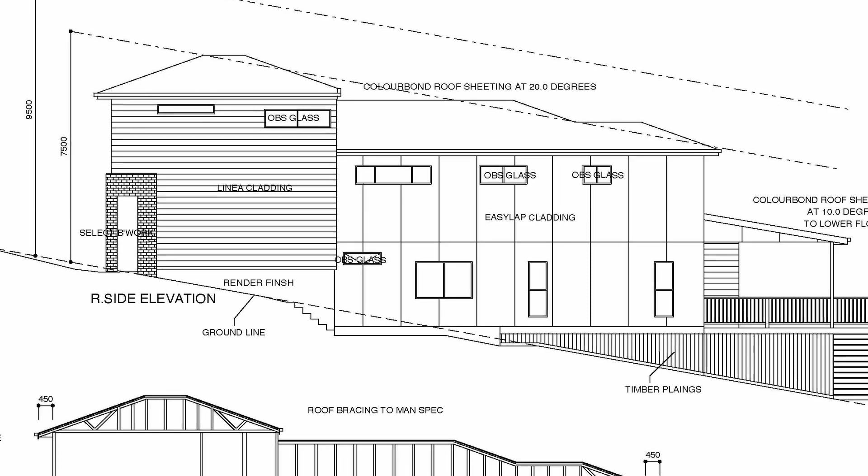For this particular job, we had an interesting sloping site with a significant height difference of 8 meters between the highest point to the lowest point. The site sloped away from the road, which presented its own challenges.

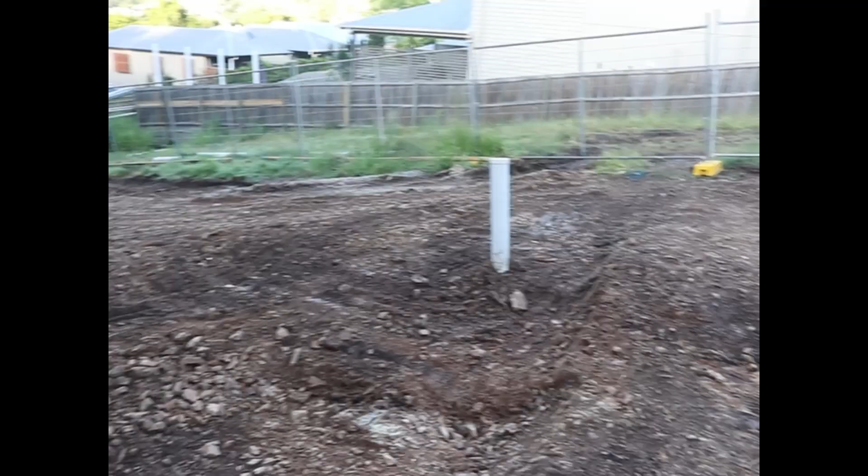When designing a building on a sloping site, the considerations can be quite different depending on the direction and magnitude of the slope and the budget of the homeowner or developer. For this particular site, we had a number of design considerations which we used to deal with the 8-meter slope.

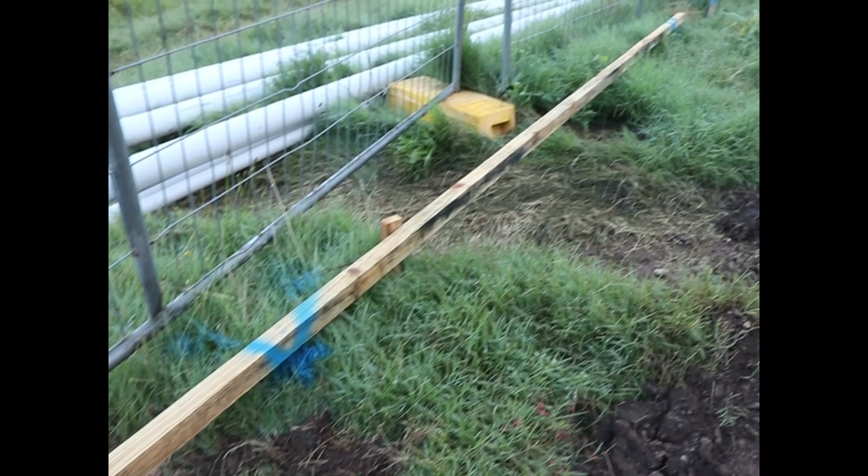After the lower retaining walls are built, we commence with cutting and leveling the lower slab area. The critical points of the building are marked by our surveyors, and we also pin the profiles, which are placed away from the building on the side boundaries of the site. This way, when we eventually lose the main surveyor's pins, we can retrieve those pins using the offset pins which we have on the profiles.

As the concrete slab is split between the lower and upper slabs, we require a retaining wall between the two concrete slabs. We commence the retaining wall construction by excavating the retaining wall footings. In this case, as the retaining wall was to be connected to the upper slab, the design required a 600mm deep by 400mm wide footing.

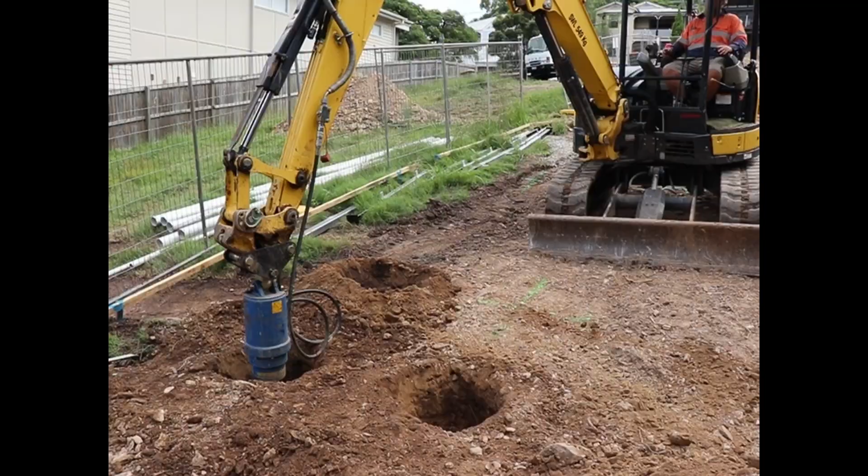While we have our machines on site, we proceed to excavate the rear pier footings. These footings will support the rear steel SHS posts, which will be set to height and will be the supporting structure for the suspended timber floor system.

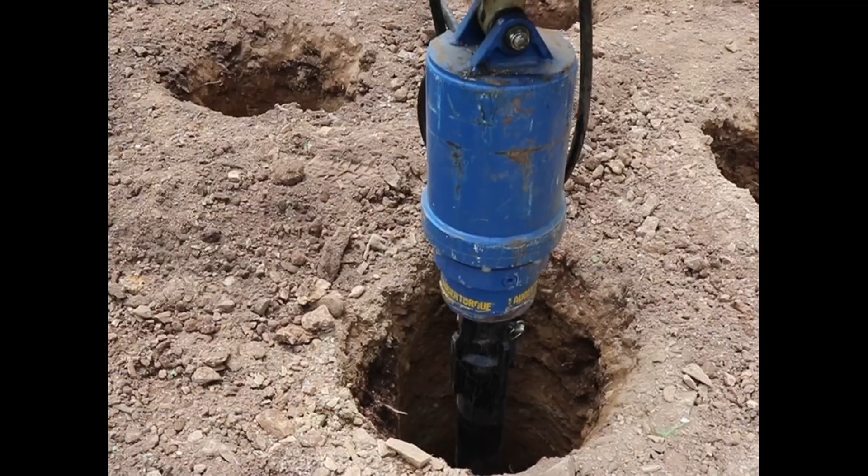When excavating pier footings, it is important to leave the pier holes as clean as possible and free from loose soil. It is critical that our concrete footing is placed onto a clean and solid foundation that will not settle and sink over time. To remove any remaining soil from the bottom of the pier holes, we use a special clean-out attachment at the bottom of our excavator's extended shaft.

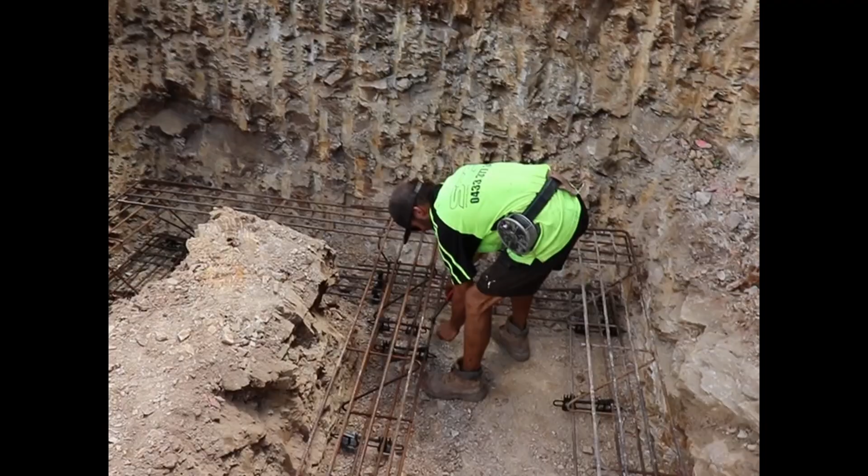Once the retaining wall footings are excavated and cleaned from loose soil, we proceed to place the reinforcing steel. The details of the steel cages, thicknesses of bars, ligatures, corner bars, concrete cover, concrete strength and other characteristics are provided by the project engineers in the structural engineering drawings.

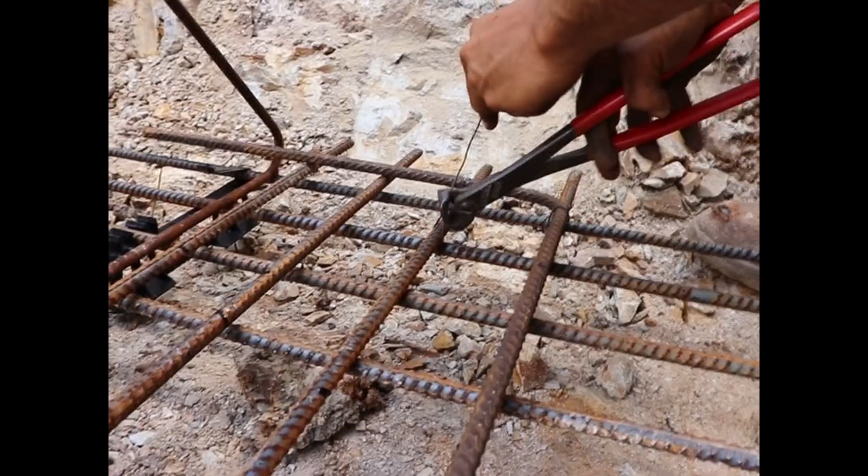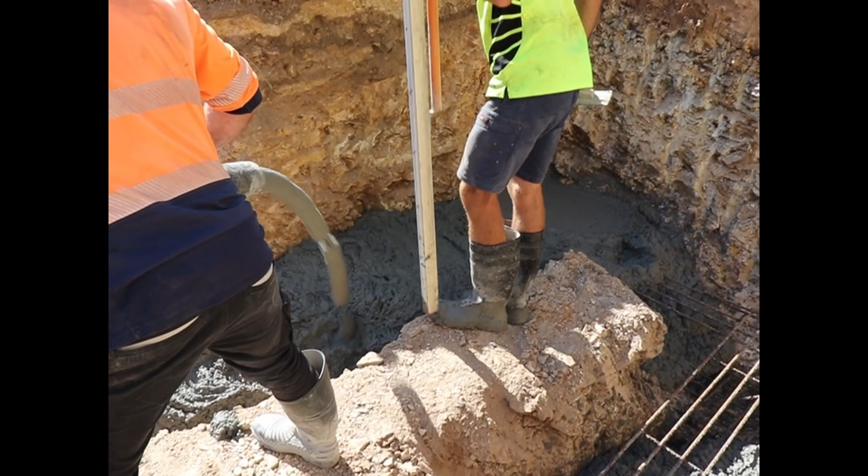If there is any confusion on site about any of the details or any unforeseen site conditions are encountered, which is not uncommon, it is important to raise these with the project engineers as soon as possible so that the details can be clarified or an alternative solution can be proposed. Once the reinforcing steel has been placed correctly and the footings have been inspected and approved by the project engineer, we can proceed to pour the concrete.

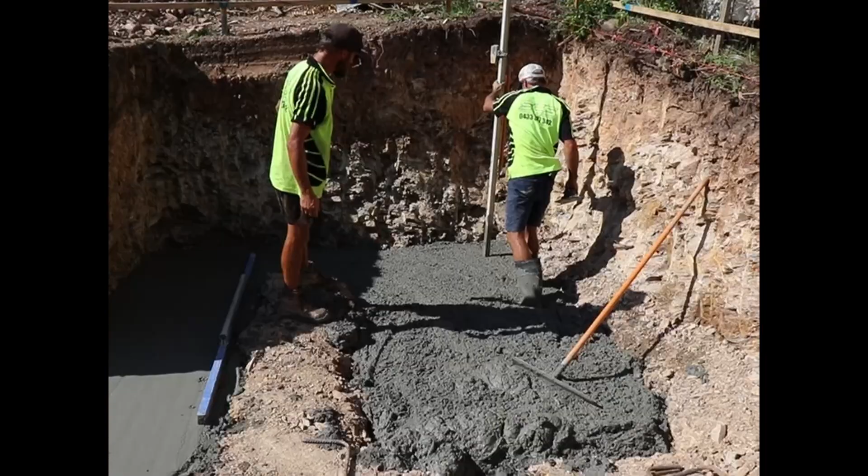In this case, we use a line pump to pump the concrete from the concrete trucks on the street to the retaining wall footings. Our concreters use a laser level to screed the concrete to ensure we are left with a smooth and level surface. We are now ready for the block layers to begin building the retaining wall.

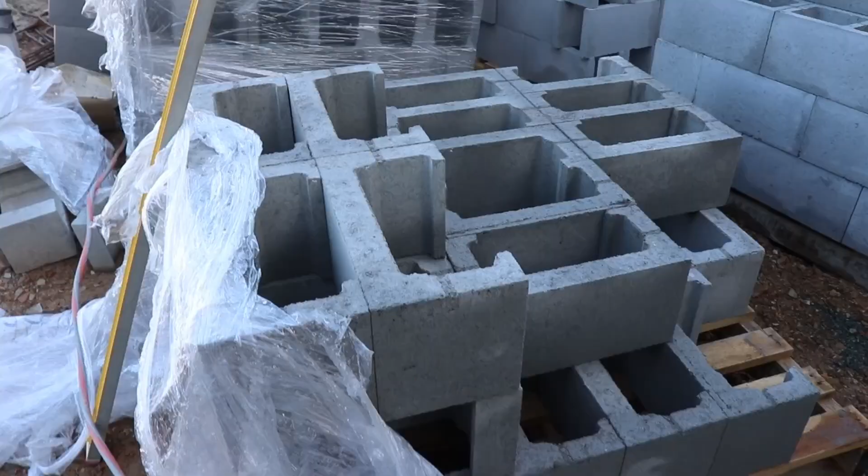The retaining wall footing is once again pinned by our surveyors, giving the block layers the precise location of the block wall. The first course or bottom course of blocks is a special clean-out block which has an open face. These are used to clean out any mortar which falls inside the wall during the construction process. Reinforcing steel is placed vertically and horizontally at regular centers inside the block wall. The details of the thickness and spacing of the reinforcing steel is again shown in the structural engineering design.

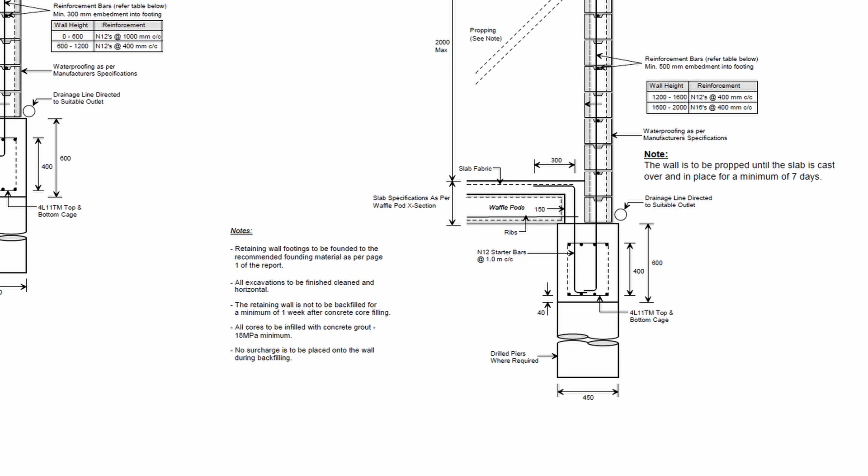Once the block wall is built, the structural engineer returns to site again to inspect the wall and the reinforcing steel. Once approved, the block layers can close off the bottom course of blocks and we can core fill the inside of the block wall with concrete.

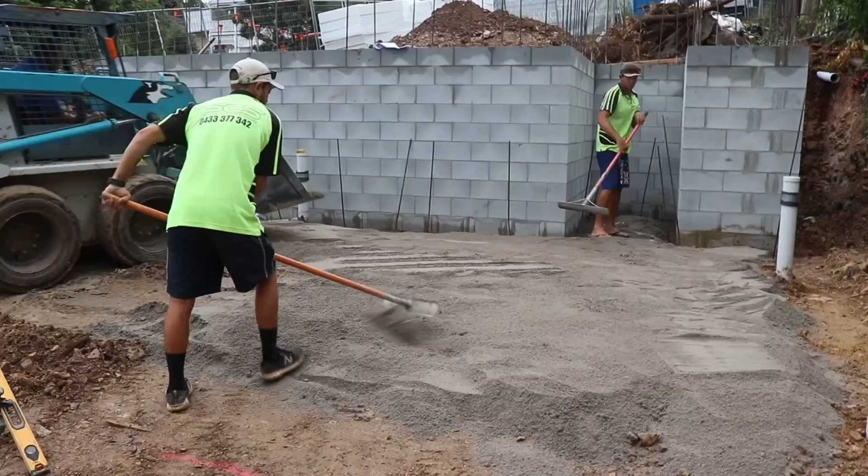Once the block wall is complete and the underslab plumbing has been installed and approved, we can move on to the lower slab. Compactable fill is delivered to site. Our concreters begin by spreading and shaping this fill to the correct heights. The perimeter of the slab is then boxed or formed up to the right height and at the precise location provided by our surveyors. For this particular slab, we used a waffle pod design.

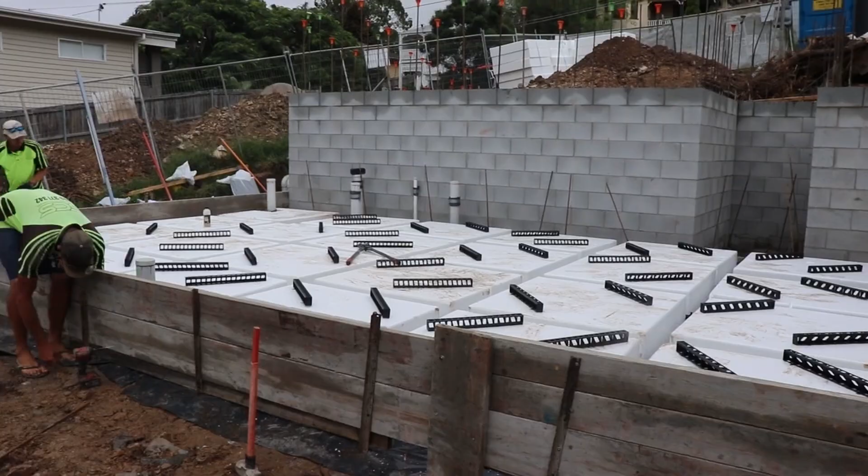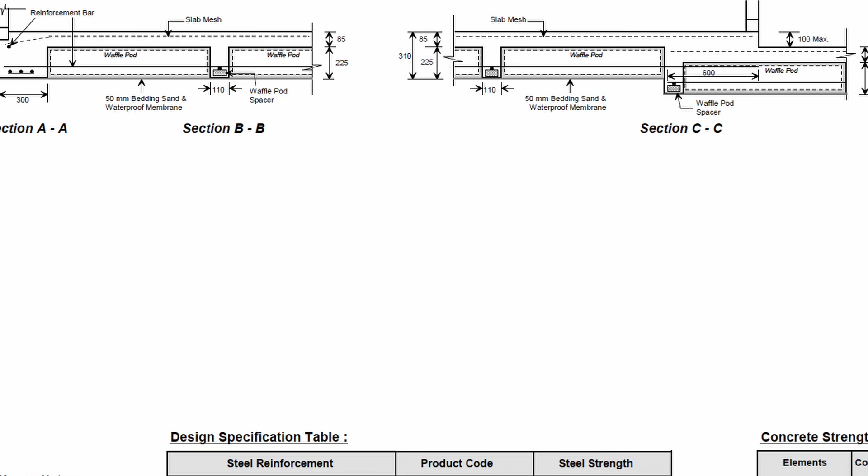Polystyrene pods are used at regular spacing to create a void inside the concrete slab. We leave spaces between each pod which creates an array of thickening beams throughout the slab. This, along with many other details, are provided by the project structural engineers and can be found in the structural engineering plans. Once again, we use a concrete pump to pump the concrete from the street to the slab area.

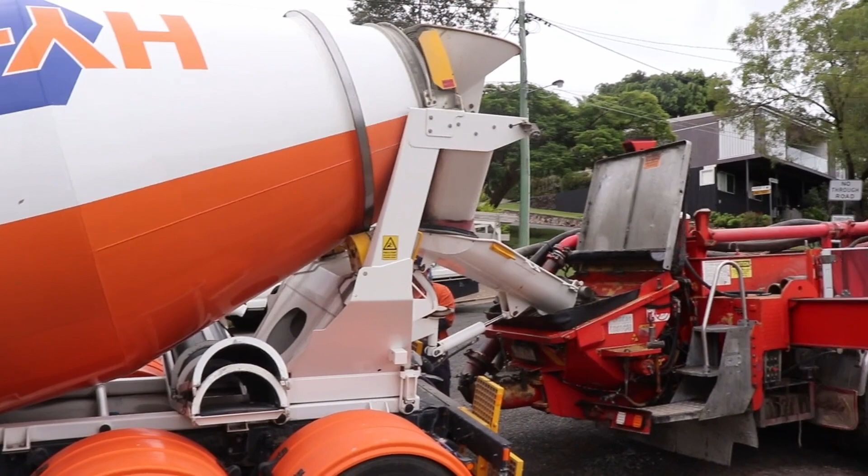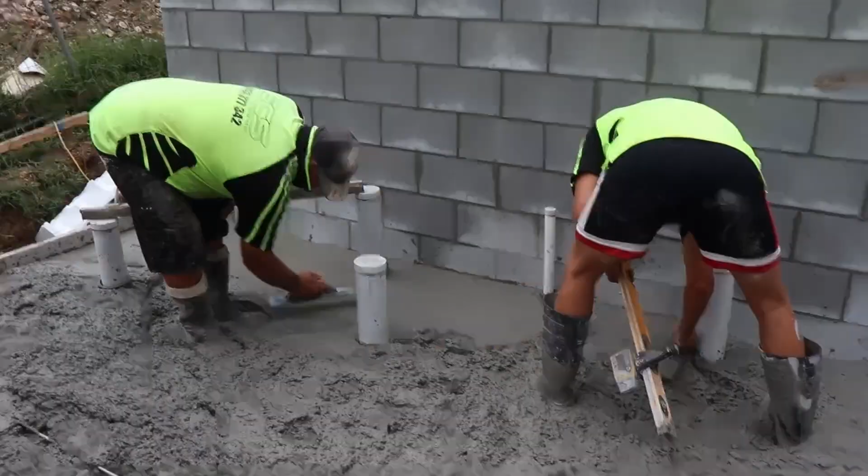In this case, we use a boom pump, which was preferable as the pump hoses are elevated overhead and do not obstruct the work area. Once again, we use a laser level to achieve the correct heights. Our concreters screed the concrete for a smooth finish.

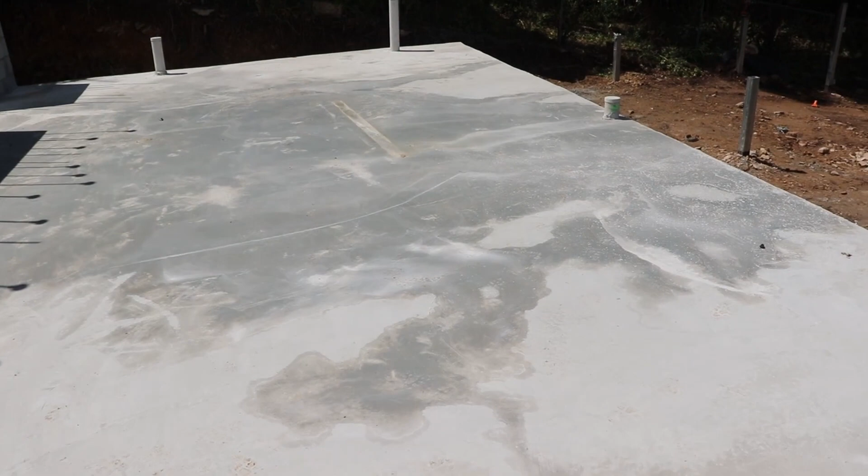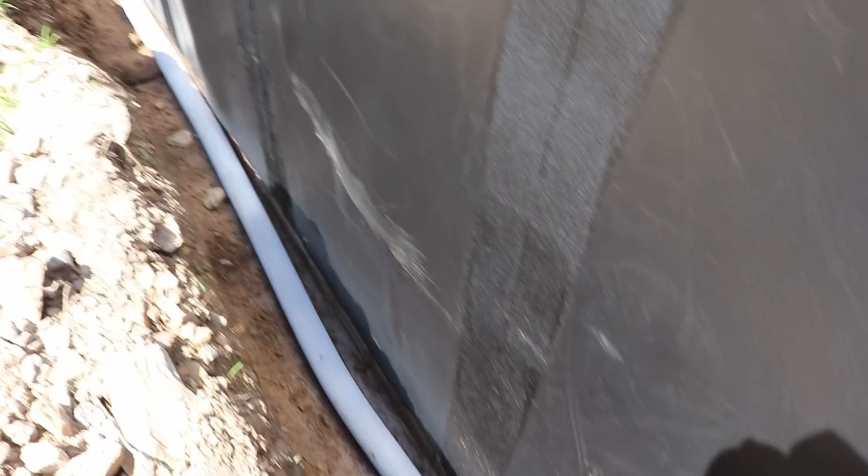The concrete block wall has now cured and we are ready to backfill. The back of the wall is waterproofed to protect the inside of the building from intrusion of moisture. We protect the waterproofing membrane with a layer of corrugated plastic. At the bottom of the block wall, we use a slotted ag pipe which is connected to the stormwater system. We then backfill the retaining wall with drainage gravel.

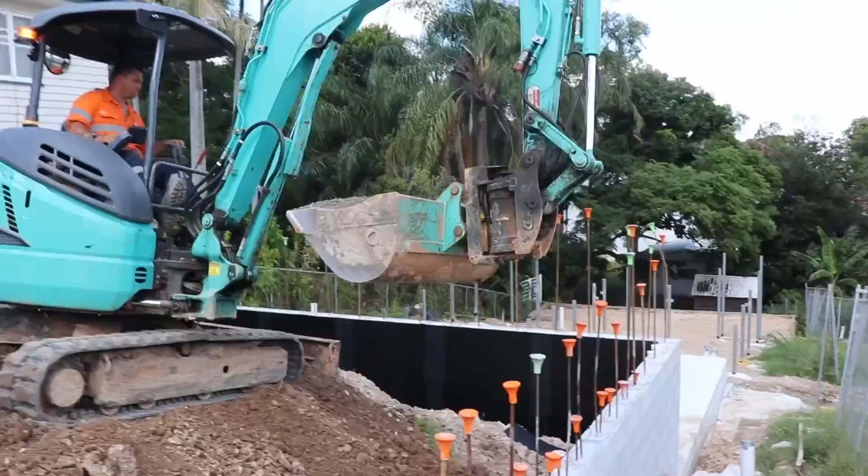This system ensures that any water that is found in this area will be able to flow freely through the drainage gravel into the slotted pipe and through to the stormwater system, avoiding a buildup of moisture and pressure behind the retaining wall.

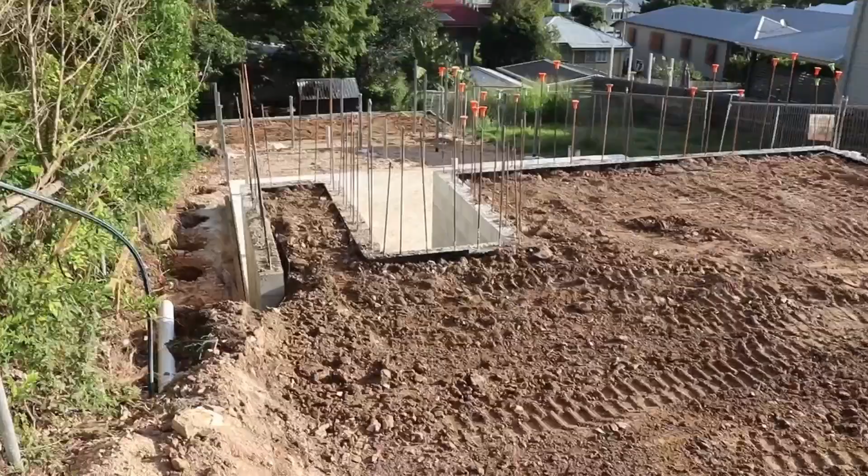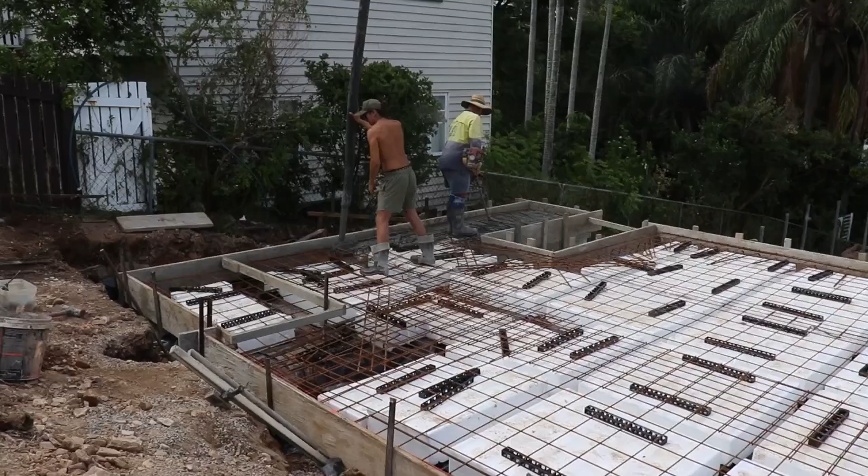Once the backfilling is complete, we clear the area of any excess soil and create a flat pad ready for the upper slab. As with the lower slab, we use a waffle pod design. The process is generally the same. We use a concrete vibrator to remove any air pockets. A laser level is used to achieve the correct heights, and our concreters screed the concrete to achieve a smooth finish.

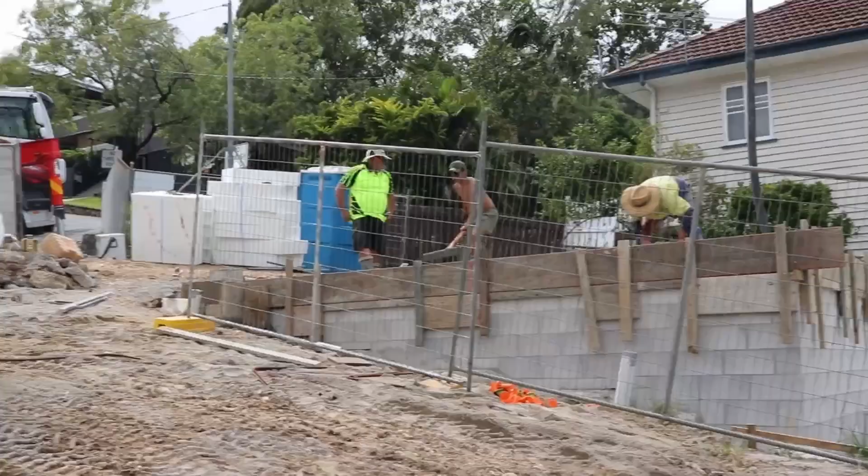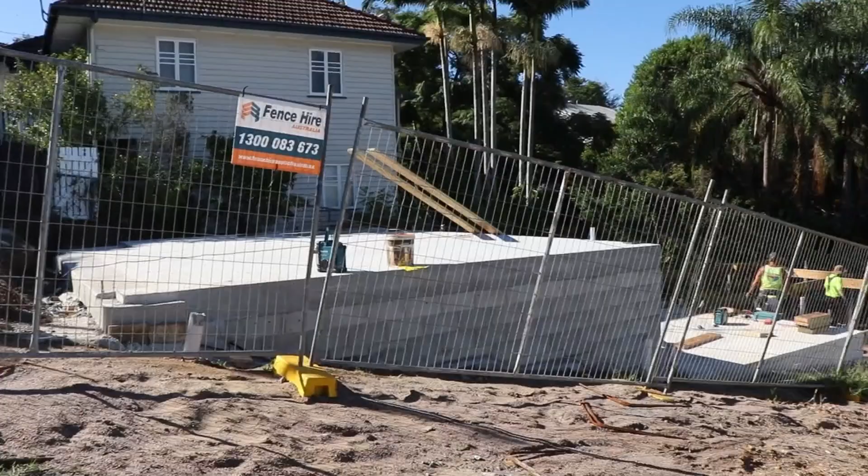This concludes the base stage of the construction process. Due to the slope of the site and the split level design, the base stage was significantly more complex, timely and costly for this particular project in comparison to homes built on flat sites. From here, we move on to the frame stage. We begin with the rear suspended timber floor system mentioned earlier.

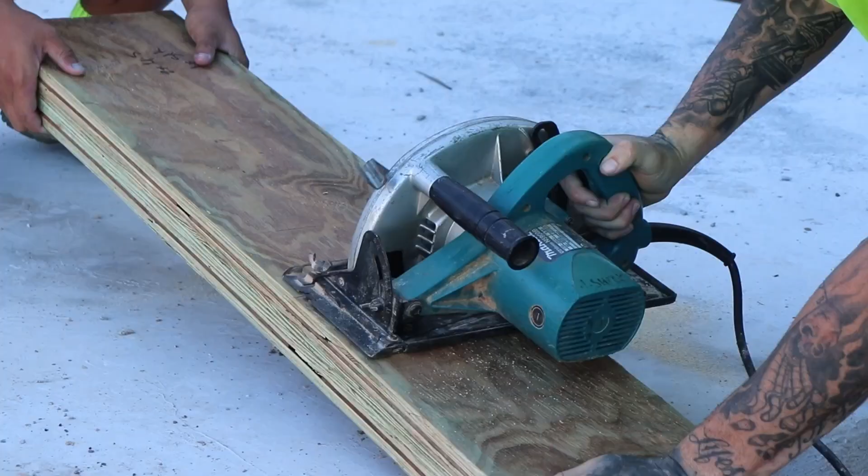As with the base stage, the construction of the frame for this project was significantly more complex due to the split level design. However, from our experience, homes with these types of complexities and design features which are built on unusual sites can often result in an end product which is more interesting and has more character than a standard home built on a flat site. We were certainly happy with the end result of this project.